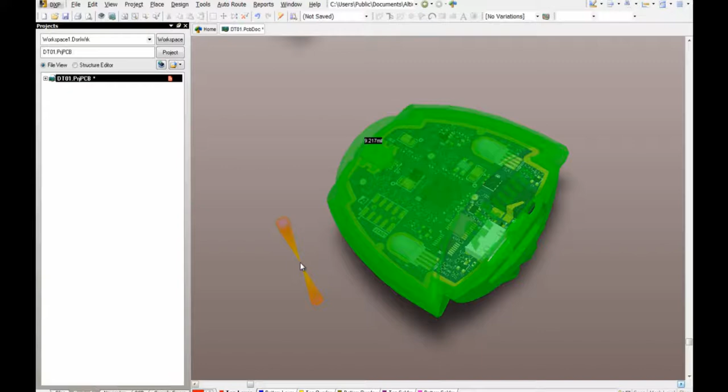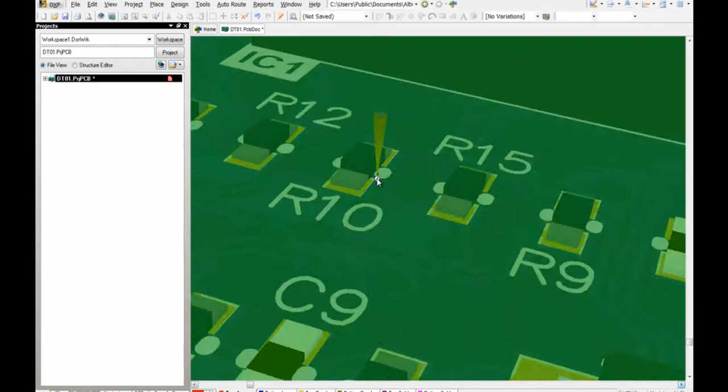Many are already making great use of the ability to add 3D component bodies and import step files into their PCB designs for real-time viewing and clearance checking of components and enclosures. An additional benefit of this capability is the ability to actually use the 3D model of the component and its features to guide creation of the PCB footprint in the PCB library.

As an example, I'm going to show how to build this connector in a PCB library. This connector is a Molex Micro-Fit 3.0 series, and fortunately, Molex provide detailed datasheets and even a 3D step file for download from their website.

I'll start by downloading the 3D step file and saving it to my library source folder, then open the PDF drawing of the connector. This datasheet contains all the necessary pin numbering and dimensions for making the PCB footprint for this connector series. This area shows the details for the PCB hole pattern, and this area shows the mechanical dimensions.

The part number of the connector I'm using is 43045-1012, which is the 10-pin version of this connector. Also note that the pin numbers begin here with pin 1 and will end at 10 over here, and there are 2 mounting boss holes needed here and here.

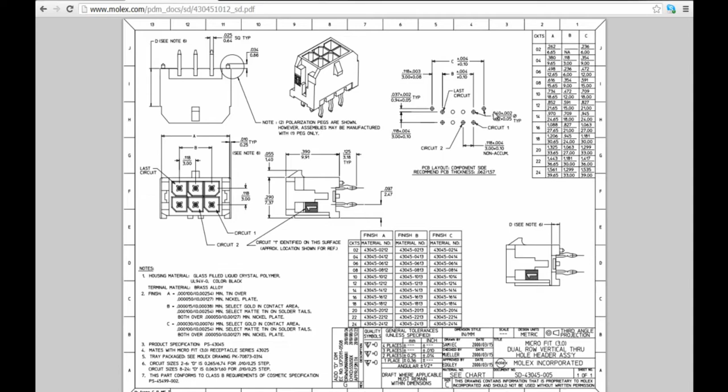I could follow these dimensions to position those, but since I have the manufacturer's 3D model as well, I'm going to use that to guide the placement of the holes on the board.

First, I'll start by creating a new blank component in my PCBlib, then placing the first pad for the connector's pins from Place, Pad. I'll hit Tab to bring up the pad properties and set this pad to have a 40mil hole as dimensioned in the datasheet.

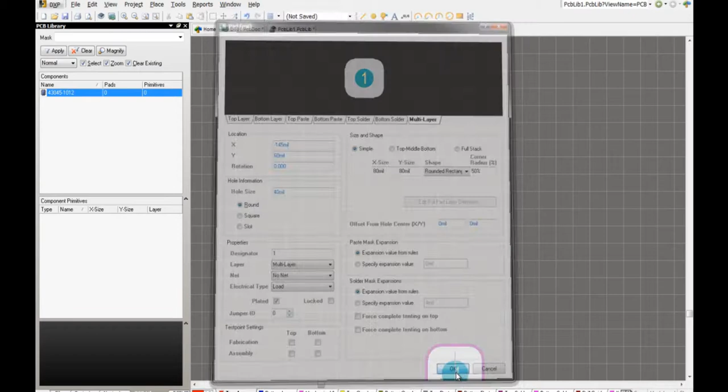After placing the first pad over the origin, I'll select it and use Ctrl-X to cut this to the library editor clipboard, then go into Edit, Paste Special, and use Paste Array to place 5 matching pads on the footprint, setting their spacing to 3mm horizontally according to the dimensions on the datasheet.

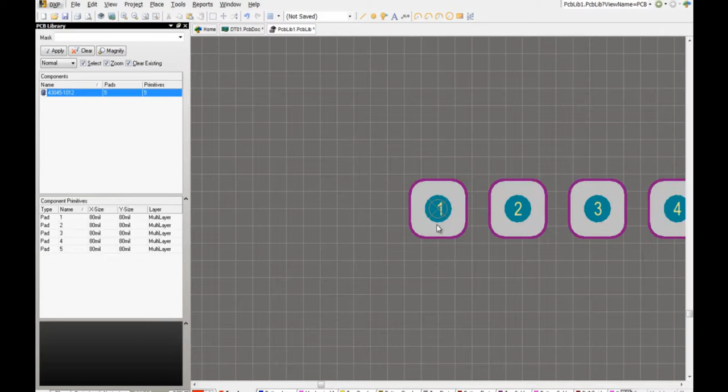I'll use Paste Array again to place pins 6 through 10. The pin numbering here is back to front along the X-axis, so I'll select all these pins and move them with the mouse using the X key to flip them along the X-axis.

Now the horizontal spacing is exactly correct, but we may need to adjust these pads along the Y-axis to get them spaced at exactly 3mm.

But here's where we can start to make use of the 3D model downloaded from the manufacturer's website. I've already downloaded and extracted the 3D step file for this connector, so I'll use Place, 3D Body, set it to Generic Step Model, and browse to the step file from Embed Step Model.

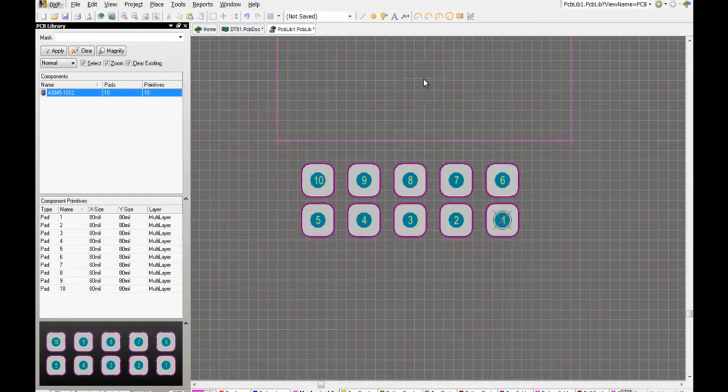Since I'm in 2D mode, the step model is shown as a simple body outline. I'm going to click to place it just above the pads and hit Cancel when the 3D Body dialog reappears.

Next, I'll go into 3D mode by hitting the 3 key. In 3D mode, I'm using the same mouse gestures to zoom and pan, only with the Shift key down I can also rotate using the right mouse button.

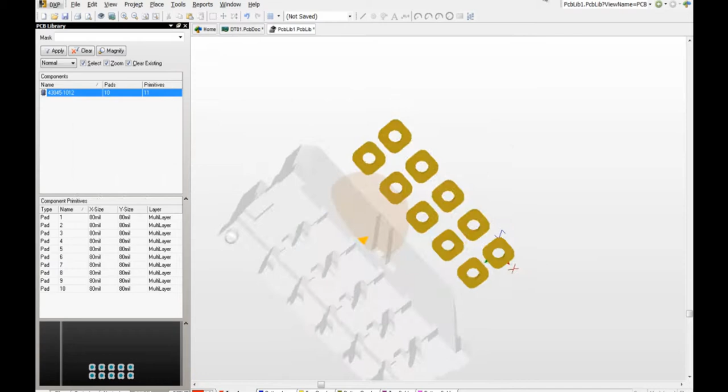With the connector positioned like this, it's easy for me to place snap points on the pins. You can also see clearly the 2 mounting bosses I mentioned earlier, here and here.

First, I'm going to place a snap point in the middle of pin 1 on the connector to align the pins with the pad holes.

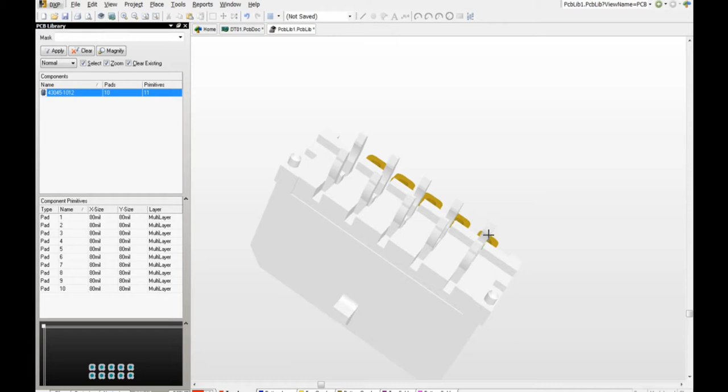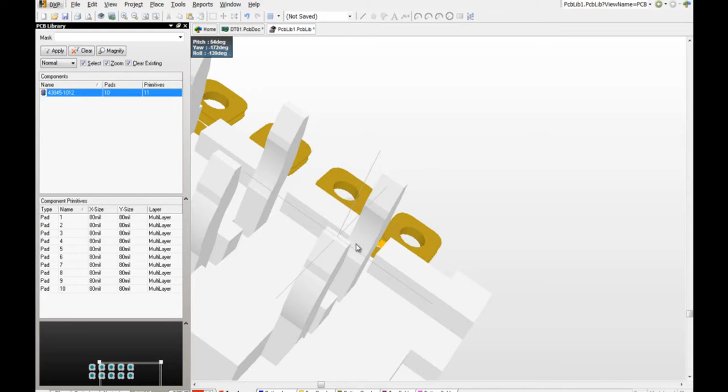To do this, I'll use Tools, 3D Body Placement, Add Snap Points from Vertices. The snap point cursor prompts me to select the 3D body of interest first, then snap to vertices on the model. Since I want the exact center of the pin, I'll press spacebar and click on 2 diagonally opposite vertices. This puts a snap point between the 2 corner vertices, which happens to be the center of the pin. I'll add a similar snap point to the corresponding pin on the second row too.

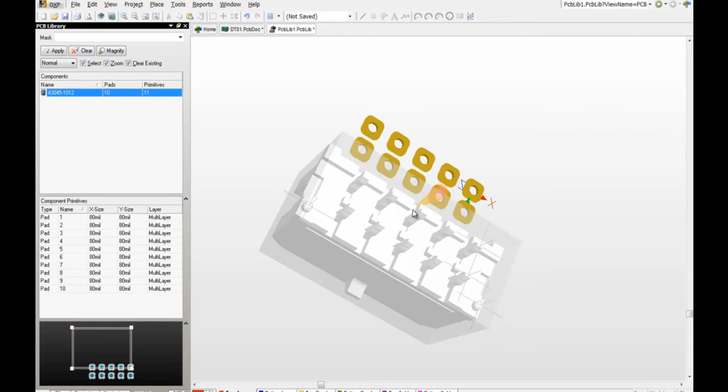While I'm at it, I want to add snap points to the center of the 2 mounting bosses. That will enable me to add accurately positioned holes for these afterwards. Notice that on these circular bosses, the snap points can be easily added to the center of them, which is exactly what I need.

Now I can clearly see those are in the right places, so I'll press 2 to go back into 2D mode. The snap points are now available also in 2D mode, so when I click and drag the mouse near this one, it's easier to snap it to the center of pin 1.

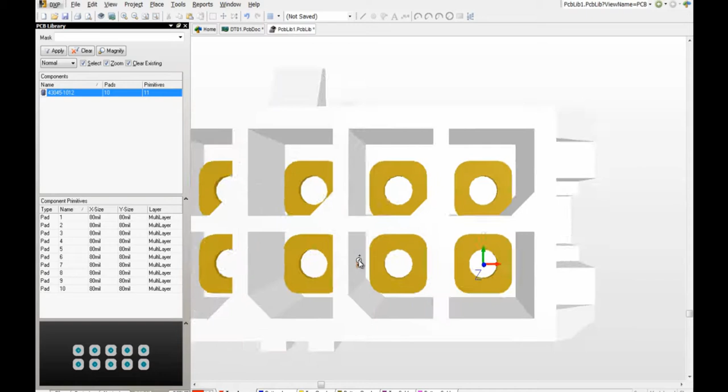But pressing 3 again reveals that the 3D body is not set to the correct height, so I'll go to Tools, 3D Body Placement, Set Body Height, and choose any vertex which is going to be at the PCB surface. Then in the pop-up, select Board Surface and hit OK. Now we see that the height is correct.

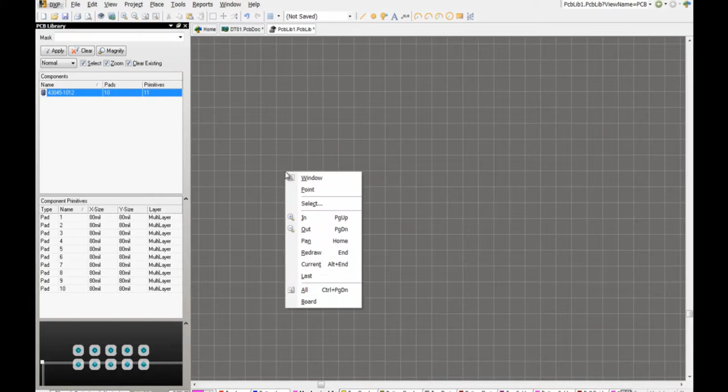I'll go back into 2D mode again. I can see here that I need to move the second row of pads into alignment with the 3D model's pins as well, so I'll select these pads with the mouse.

Then clicking and holding the left mouse button as close as possible to the middle of pad number 6 will grab them and also snap the cursor to the center of that pad. That's very convenient because now I can move these under the mouse cursor to the pin 6 snap point I added to the 3D model previously.

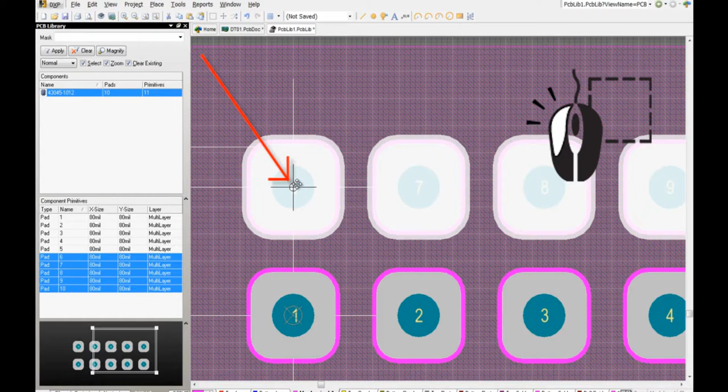And I can tell when it's snapped to center because a small octagon appears, so I'll release the mouse button.

Next, I need to place unplated 40mil holes for the two mounting bosses. I'll use Place Pad again, but this time I'll set the pad size to be 20mil and the hole to be 40, so there's no copper, and clear the plating option so there's no through plating specified either.

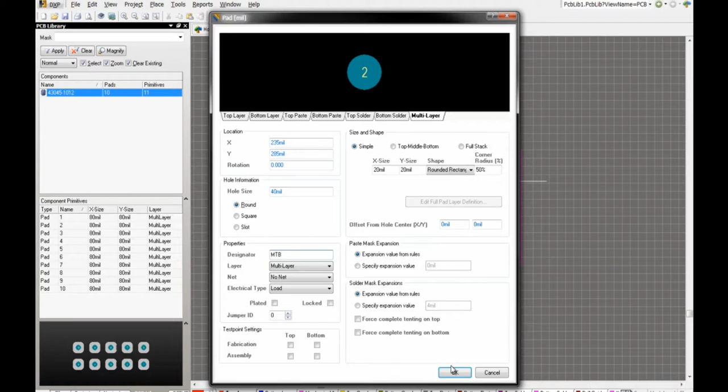I'll designate these holes with a non-numerical string, in this case MTB, so that those will not be linked to the PCB nets in any way. When I hit OK to continue placing these mounting boss pads, you can see that the snap points on the bosses are useful for precisely positioning these holes.

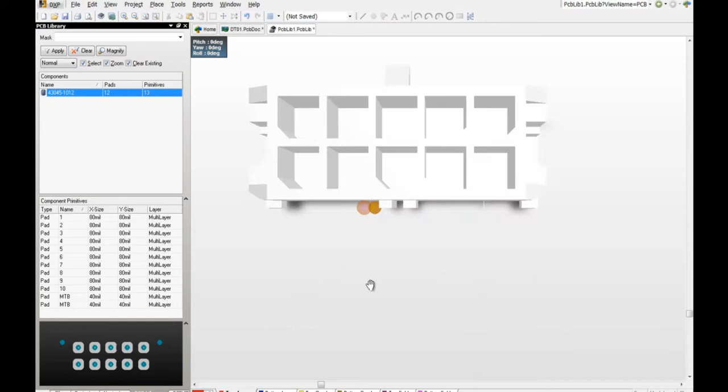The last step for me is I want to have an accurate silkscreen representation of the connector on the PCB. So I'll go back into 3D mode and place some snap points at strategic vertices of the 3D model. These form a guide which I can easily follow to draw the 2D outline of the connector on the top overlay layer.

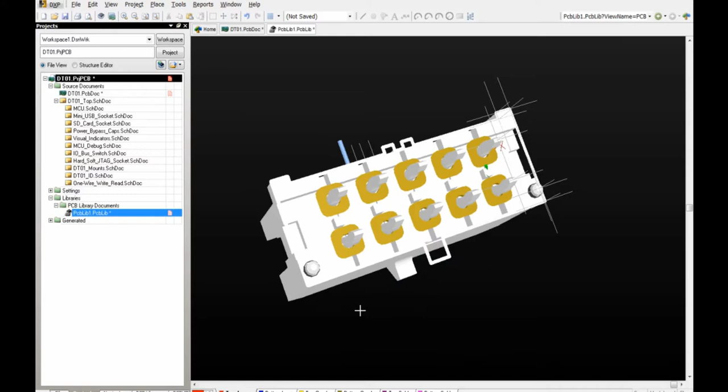Now that I'm finished making this PCB component, I can remove all of the snap points on the 3D body so that they don't show up in the designs that will use this part. To do that, I'll go back into 3D mode with the 3 key and use Tools, 3D Body Placement, Remove Snap Points. Here I can just keep clicking until they all disappear because the mouse cursor snaps to each snap point automatically. So that's how you...